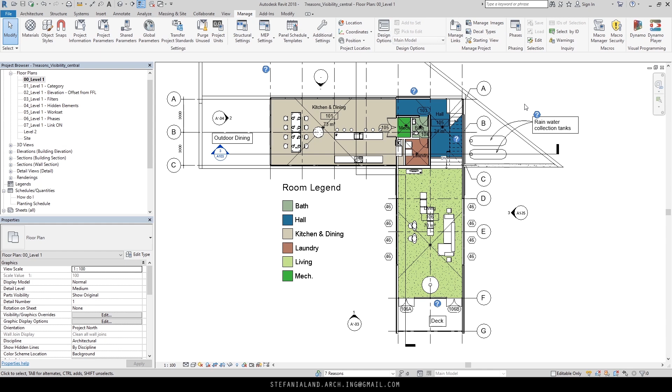So you just need to use this list based on your needs. But let's stop talking and let's have a look at the list.

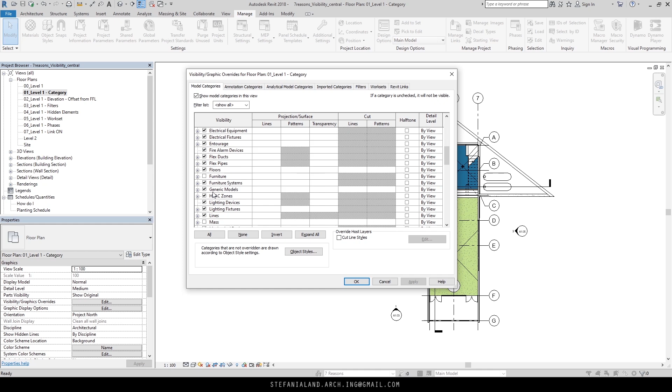The first reason why we're not able to see an object in Revit can be a silly reason, but I can assure you it happens more frequently than you'd expect: the category being turned off. So we need to make sure that if we're working in the view template and go to furniture, as in this case, the category isn't unticked. When I turn it on and apply it to the view, here we are - I can see all my furniture.

The second reason an object cannot be visible in your view can depend on an instance property - in this case, elevation or offset from FFL. What does that mean? When we select an object, it has some instance parameters, like a level. In this case we have a sofa applied to Level 1 Living Room, but for example it's not applied to Level 2. If it were assigned to Level 2 and we're working on the Level 1 floor plan, it's pretty clear we wouldn't be able to see it in any way.

Another reason can be the offset. As you can see here, we have a gap. We have two ways of checking the offset from FFL. In this case, we can work through the floor plan itself, and one way is by amending the view range, found here in the view properties. If I type 2000, that's 2 meters from FFL.

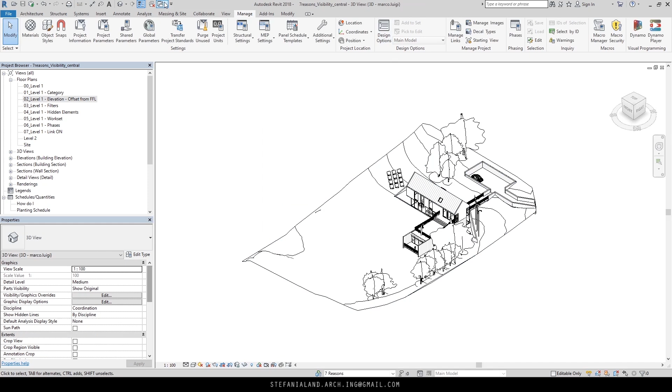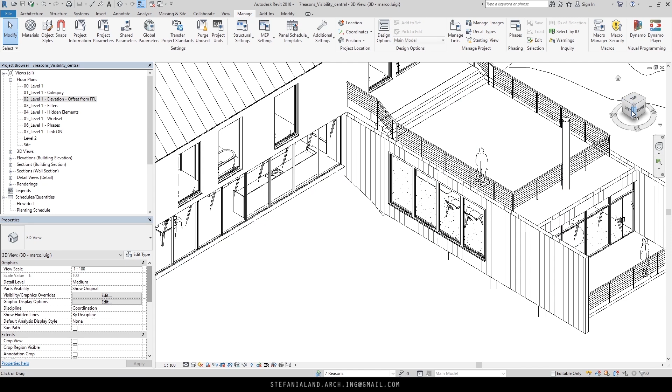I just want to show you another version. Let's assume, for example, that I'm going to put it back at 2000, and then I'm just going to quickly go on my 3D views. When I spin it around, I can see immediately that there is a sofa flying in the space.

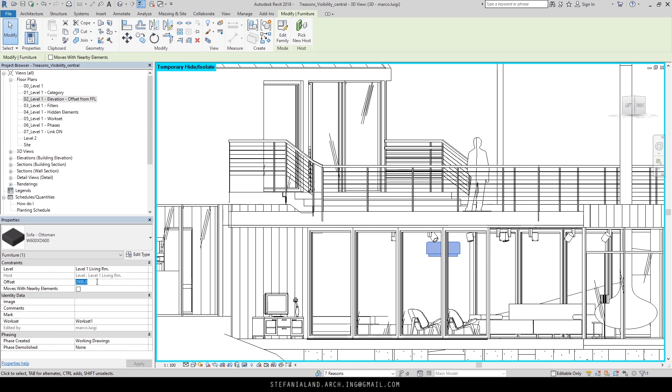If I hide this sofa on this wall, as you can see, the sofa is on the ceiling, and it's missing from the floor. So I can immediately see from the 3D that something is wrong here. The simplest way is just selecting the 3D object, going here and typing 0, and immediately the sofa has flown down, has gone down. Here we are, and now everything is set up as it should be.

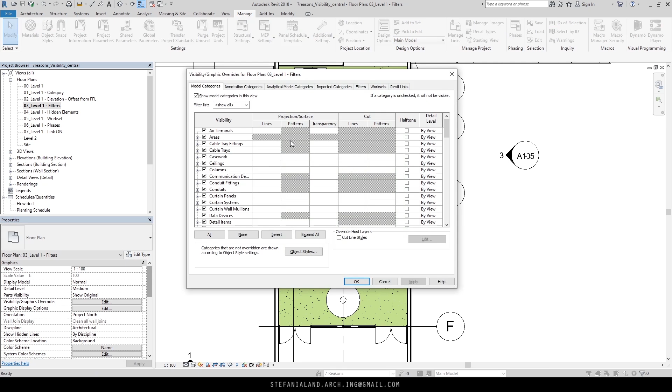That's the reason why we can't see some object filters on the views. So what I should do is go into the view template, check the filters, and immediately I find a furniture sofa ottoman with visibility unticked, so I don't want this object visible. When I remove this, here we are, you can see them.

Reason number 4 are hidden objects. It can be us, or it can be other team members, but sometimes people, because they are in a hurry, just hide objects in views. So what we should do is turn on hidden elements mode, with this little button here, a bulb of a lamp.

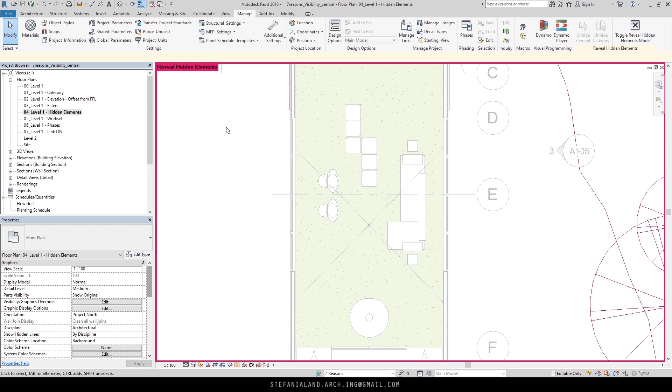As you can see, I have a sofa that has the same reddish color as this box saying reveal hidden elements. So when I select this object, I can do unhide element, and when I release, I can see that my sofa now has the same grayish appearance, and doesn't have the reddish color anymore.

So when I release this mode, here we are able to see all our sofas immediately. Reason number 5 are worksets. We all know that sometimes we can forget to change the workset before starting modeling inside Revit, and therefore we assign a wrong workset to our 3D object.

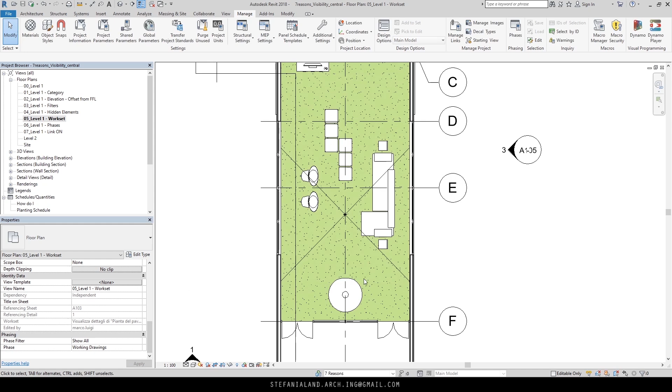So what we should do in this case is hide the work set from the view. We need to go inside our visibility properties, in the work set tab. Here we have work set 7, which is set to hide. When I do show, making sure it will be visible no matter what, here we have 6 sofas again, and when I try to select this one, I can see in the instance properties that the work set is work set 7, the same one I was hiding before.

If I select this other one, the work set is different here because it's work set number 1. So what should I do? I just need to select my object, click on this arrow, and bring it back to the same work set as the other ones.

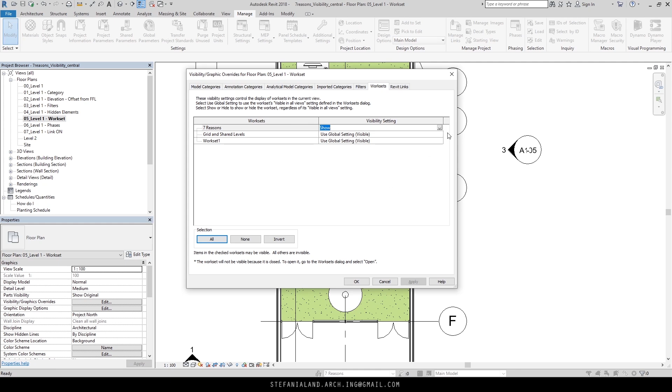So if I hide my work set again, and apply, as you can see I still can see 7 objects, and this is important because we just realized that we had populated wrongly some data in our BIM model.

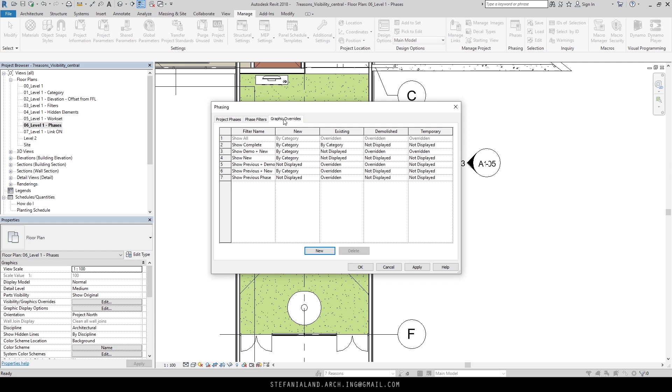Reason number 6 are phases. We all know that in Revit we can apply different phases in the same model. If you're interested in how phases work, you just need to go into manage phases, and you're going to have the project phases, the phase filters, and the graphic overrides as well.

If I try in this case, I can see that I'm missing something here, but to check how phases are applied in this specific view, what I should do is go into the view properties, scroll down until the end, where I'll find the phasing settings.

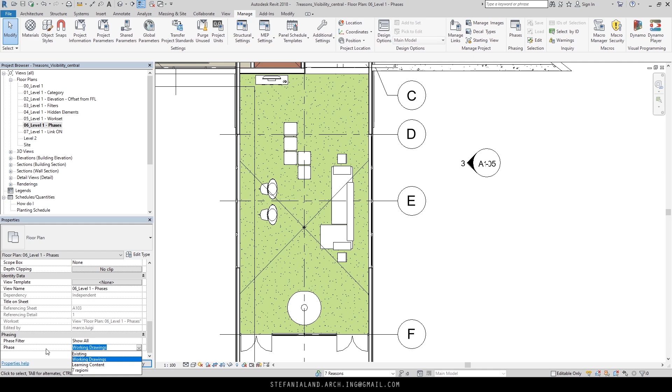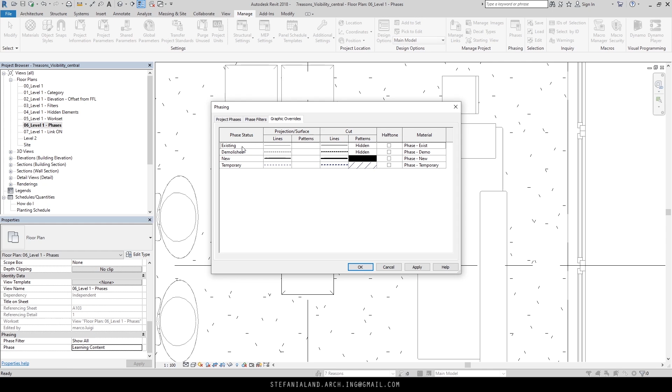In this case, if I try to change the phase and not the filter, let's do learning content. As you can see, we have these 2 sofas that are more black than these ones, which are half tone. Remember, there is also a graphic override here - the existing shows as gray and the new as black. So immediately we can see these 2 sofas have a different phase than the other one, because when I select the third one, Revit cannot tell me just one single option.

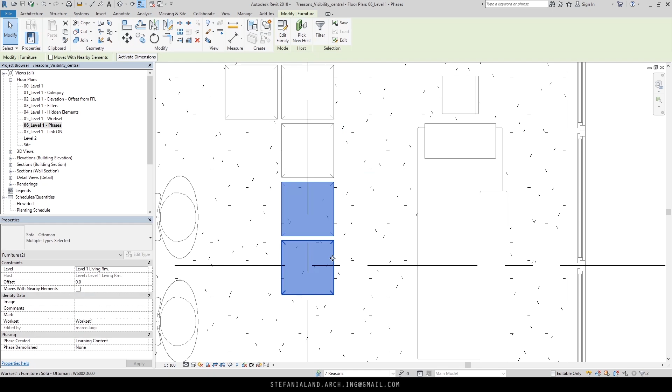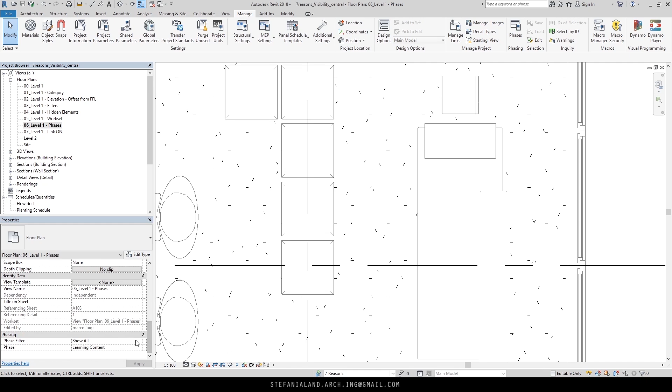So what should I do? I just need to select the correct one and see what is there. This object has a working drawing phase created, and phase demolished as none. When I select the other ones, the none that Revit showed me when selecting the third one is the same, but the phase created is different. Now if I bring it back to working drawings like the others, all the appearance is gray. When I change the phase of the view, I just want to see the phase of the working drawings - here we are, we have all our sofas.

Reason number 7 is links. We need to make sure first that the link is loaded inside our Revit model. If I scroll down here, I can see that the link is loaded. I can also go to Manage Links and check it from here, and the status is loaded.

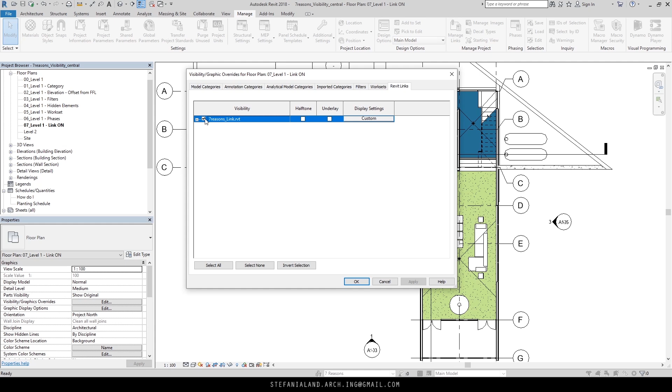But what is actually missing? I should have some chairs and a table here, and I have moved this furniture inside this link - 7 reasons - and as you can see, I'm not able to see it even though the link is on. So what should I do? I just need to go into the view template and check if the link is on in this specific view, not in the model like before - and actually it's unticked. So the moment I tick it, apply and OK, immediately I'm able to see all my furniture. As you can see, I have a table and some chairs.

I also want to point out that when we are talking about links, all the previous steps can be applied as well. So the same ideas that we have just developed up to point number 6 can be applied again, not in our model, but in the linked model.

If I need to check the categories, I just need to go into custom and model, making sure that the furnitures are on. If I need to check elevation or offset from FFL, and if it is wrong - if I have some 3D object flying around the project - it's pretty clear that I need to open the 3D model separately, amend the properties of the 3D object, and then reload the link model inside my working model.

The filters work also for links. Sometimes it's more complicated, but the filters can be applied to links too, so keep an eye on it. Hidden elements work exactly the same - I can hide the whole link, or if I tab, I can hide just one single object of the link. So I just need to reveal hidden elements mode and see if my link is visible or not. The work set I can check from here as well, making sure that the work set and the links are always on.

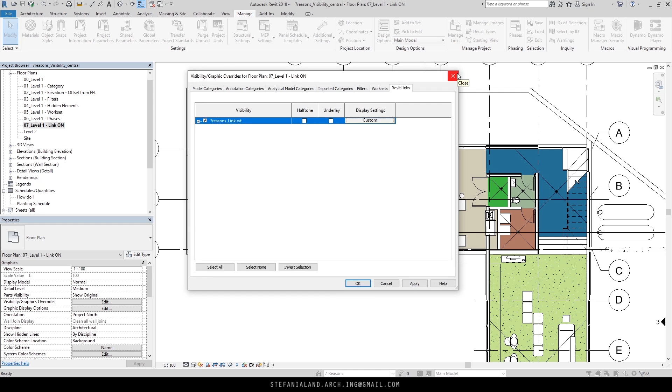And talking about phases, I'm going to check them here - we have the phase and the filter phase as well. If some phases are not applied correctly to a single object, the workflow is the same as for the elevation offset from FFL: we open the link model separately, amend the property applied to the 3D object, save, and then reload the link back into our working model.

And for this video, that's all. We have highlighted all 7 points that can be the reason why we are not able to see some object in Revit. So keep practicing, enjoy your Revit, and have a nice day. Bye bye.